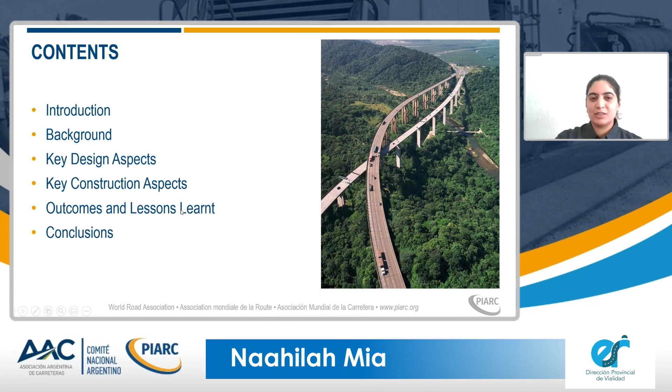Okay, perfect. All right, so the contents that I will be discussing today are the introduction, the background, key design aspects, key construction aspects, and the outcomes and lessons learned with regards to this project.

This project was located on the Camps Bay Drive, situated in Camps Bay in the west of South Africa, a major scenic route that links Cape Town and the CBD to Camps Bay and Hout Bay.

It is going to become a bus rapid transport system road, so there will be a few buses on this road. The city of Cape Town does have extensive stockpiles of reclaimed asphalt, and currently they're using this material for shoulders, which is a poor use of high quality material.

This would be the first trial where the city will be using an off-site static mobile mixing BSM foam on a road.

A background on this project: it was originally constructed in 1848 to provide access over the Kloof Nek to Camps Bay. It was then converted to a tramway from Camps Bay to Kloof Nek, known as the finest tram ride in the world.

In 1933, the tramway was ceded to the city council and converted from a tram road to a motor road called the Camps Bay Drive. When they converted it, there was no attempt to alter the old tram route by straightening the curves.

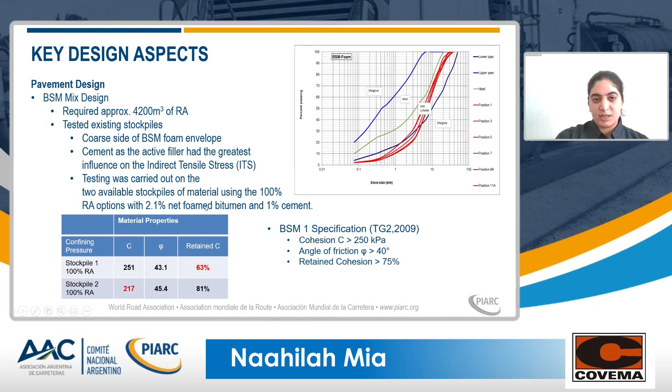So as part of the BSM design, in order to assess the impact of not meeting the specification, a sensitivity analysis was carried out on the pavement design using the deviator stress ratio (DSR), varying the stiffness, cohesion, angle of friction, and traffic loading.

For construction, we box cut the road widening by 1.4 meters, milled off the asphalt to stockpile, removed the macadam, and then paved the BSM in 200 by 100 millimeter layers. On top of that, we placed an AE2 binder asphalt layer of 50 millimeters.

The outcomes and lessons learned from this project: the BSM mix is very feel dependent, so we needed to pay close attention to the moisture content, and we needed somebody on site with experience in BSM to determine whether the moisture content was correct.

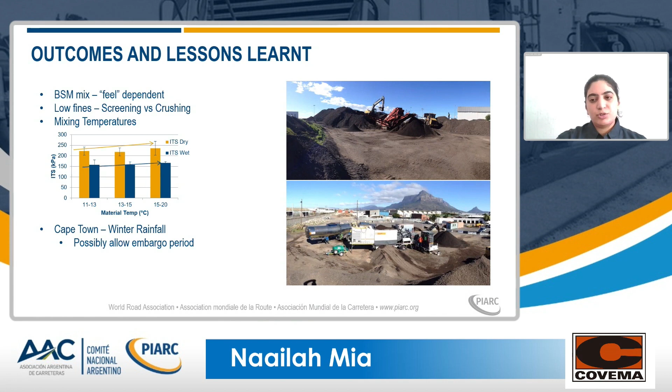After this project, we learned that maybe in Cape Town, for example, we should look at an embargo period where BSM should not be paved during certain temperatures or at certain times of the year.

In conclusion, using recycled asphalt in road construction can reduce the use of virgin aggregates, reduce emissions from transport and asphalt heating, and creates a cycle of material that can be recycled.

For volume of use, when used in asphalt surfacing or bases, you can only use approximately 20 to 40%, per South Africa's standards. But if you use it in a BSM, in your lower layers, you can get up to 90 to 100% use of recycled asphalt in roads—a more cost-effective and sustainable solution for the future in a world where we are depleting aggregate resources.

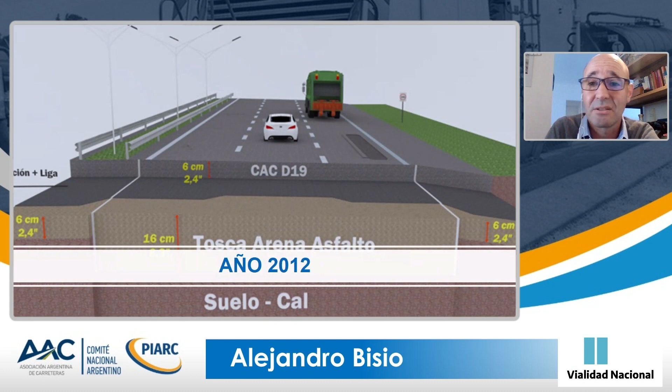The structural package of this highway was from the 80s, consisting of an asphalt layer of 6 centimeters over sand and asphalt, as you can see on the graph, and this was over lime soil.

When we started with the construction works, the structure was worn out in general, with great rutting in the slow lane and some cracking. This was the result of rigidity in the asphalt layer, and also structural insufficiency for the traffic going through this highway. So the decision was made to start rehabilitation.

The project was conducted by the University of La Plata, and given the structural status and the material status, we decided on a project for a 10-year life cycle that included the laying of 400,000 tons of asphalt mixture.

The solution for the fast lane was different from the solution for the 2 slower lanes. Let's focus on these 2 slow speed lanes, because in this structure we include the recycled material.

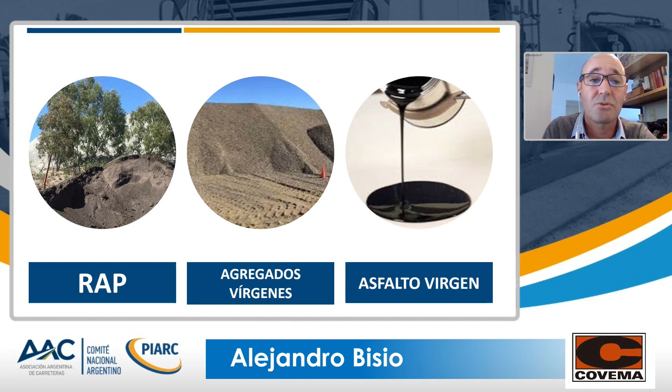If we come to the design stage, we may say that apart from the usual components of the asphalt layer, we had a new supply here, which was the RAP that came from the previous layer. At this stage, when we had to define the work formula, we decided that the performance of the asphalt mixture containing the RAP should have the same behavior and the same performance as an asphalt layer of the same nature—meaning the same granular composition and the same degree of conventional binder, but made up from virgin materials. This was the premise for the development of the work formula.

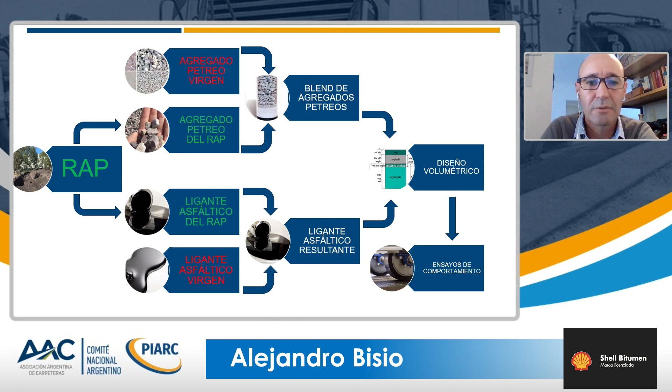Once we had the granular structure and the resulting asphalt binder, the optimal mixture of the asphalt was designed based on volumetric design. And once we got that, we started with the verification and testing stage.

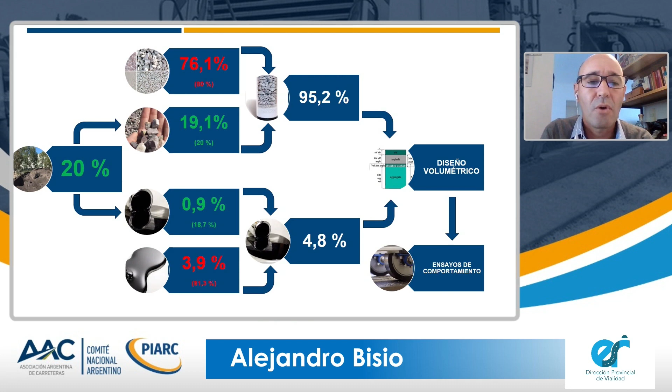Let's give some details on the design project, but this is a final result of the design process. So the recycling rate was 20%. This 20% RAP provided 19% of granular structure. 76% of the granular structure came from the virgin aggregates, 0.9% of the asphalt came from the binder contained in the RAP, and 3.9% came from the addition of virgin asphalt binder.

As to the RAP features, the mean optimal asphalt content throughout the works was approximately 4.5%, and the status of the RAP asphalt as regards its behavior had 60 degree viscosity, and the mean value, considering natural fluctuations because it's a recycled material, was 42,000 decipascal seconds.

So, for the asphalt binder, we used washing tested with methylene chloride, and the binder came from a controlled distillation through steam, and once we got the asphalt binder, we started with the rheological status test in the lab at 60 degrees.

Why viscosity should be 60 degrees? That was the reference parameter we adopted, and it's basically because in Argentina the asphalt classification is based on 60 degree viscosity. The Argentine regulation divides conventional asphalts into 5 grades, and in this case the asphalt design is the one that should be used in the asphalt mixture if the mixture should have been virgin.

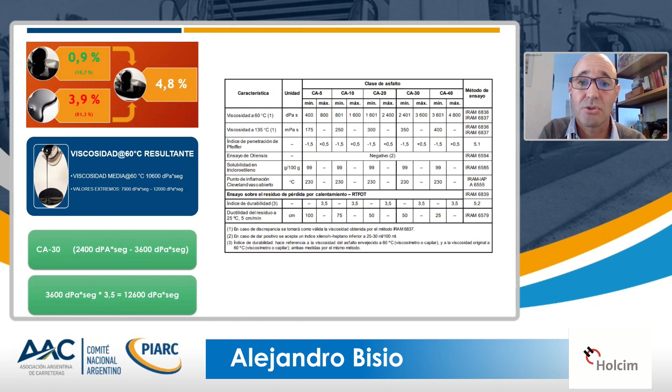Mean viscosity at 60 degrees was 10,600 decipascal seconds. In order to have this viscosity in the resulting asphalt binder, it was not necessary to use a lower grade asphalt binder. We just used CA30 as the virgin binder. In certain specific cases, in order not to exceed this limit viscosity value, we used one or two lower grade binders, maybe CA20 or CA10, but in general we used the same grade of virgin binder.

As to the granular structure, 76% of the virgin asphalt came from 2 coarse aggregates, 1 fraction of fine aggregate, and 1.2% lime because of durability issues.

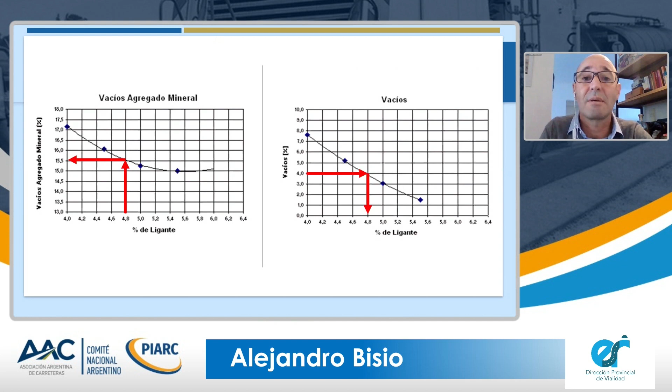Once we already had the granular structure coming from the aggregate blend and the asphalt binder, we fixed as design criterion the asphalt content with 4% voids. So then we tested this material mechanically against moisture damage and permanent deformation through the wheel tracking test.

Once we had our mixture designed, we went on to constructing the mixture. But first, we have a previous stage that is very important in order to be successful in the recycling: RAP management. RAP management is all the tasks to reduce the natural variability of the RAP because it's a recycled material.

This means that we need to divide RAP by origin or size. In this case we did not do an origin division because it all came from the same place, but only from stretches where patching was done.

What we did was division per size. We had a coarse and a fine fraction of the RAP, and also we had the possibility of having atmospheric coverage of the RAP given the weather conditions.

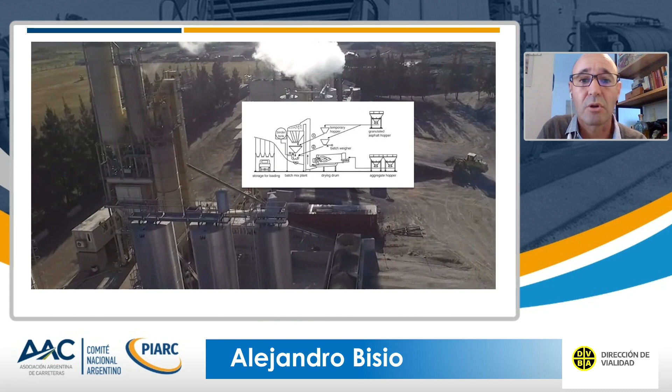So if the objective was to keep temperature constant, a difference between the two processes has to do with the temperature of virgin aggregates. In batch plants, the temperature of virgin aggregates was higher in order to compensate for that 20% RAP coming at room temperature, at ambient temperature. But we didn't find any significant difference in the rheologic properties of the components of the asphalt mixture when produced by the two different methods.

As to the compacting, this layer was laid as a subbase, 18 centimeters subbase, though this has nothing to do with recycling, but sometimes we think that this type of mixture is more complex. I can show you a photo of the works. We had the fast speed lane, and then the two slower speed lanes.

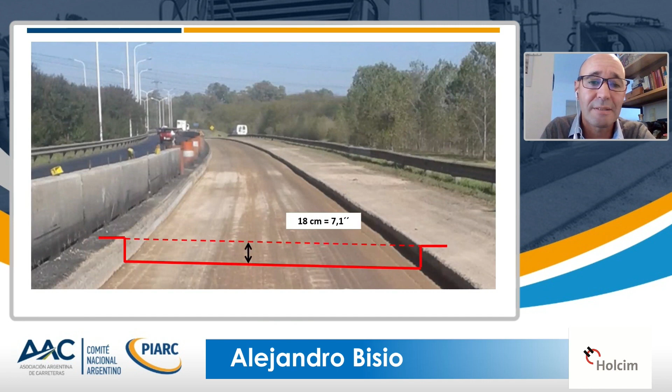Once we had the mixture, we milled the overlay, then we had an 18 centimeter trench, and the mixed asphalt layer was laid in just one single laying movement, only one operation, and those 18 centimeters were compacted with two metallic compactors, two different compactors. You can see here the photos. We had that type of box that favored all the conditions in order to achieve the compacting grade.

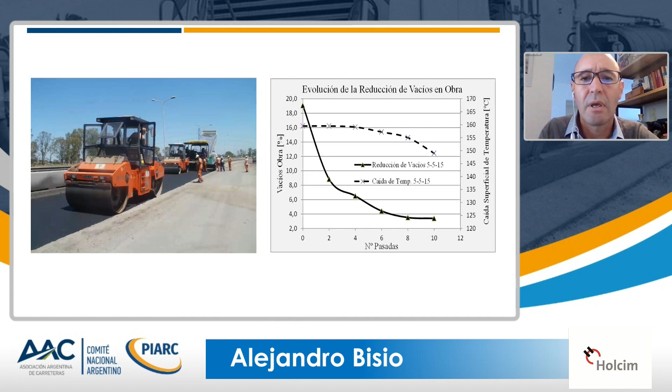In some enlargements, we laid unconfined 18 centimeters, but that was just in certain specific stretches. Then we built the cooling curves and checked them, especially for the compacting pattern design, in order to fix this compacting process, and this formula was used during the whole job. You can see a photo of the 18 centimeter samples.

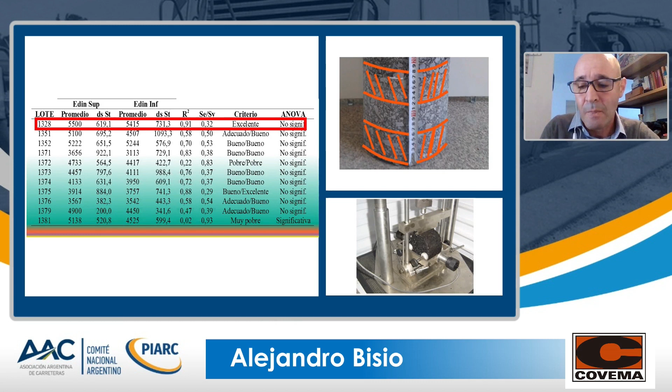Cores were used to evaluate the homogeneity of these cores, and this was successfully verified, with no differences as to the void content between the different cores. In the upper part, there are better compacting percentages than in the lower layer, but this is something to be expected. Here we can see certain mechanical results.

If we did the stiffness test, we found that there were no significant differences in the stiffness value between the upper and lower part of these 18 centimeters, having mean stiffness values of 4,500 to 5,000 megapascals. This is the look and feel of the job at the end of construction.

Now it has been going for 9 years, and these are photos of the current status at September 2021, where after 9 years of service there are maximum levels of 3 millimeters rutting.

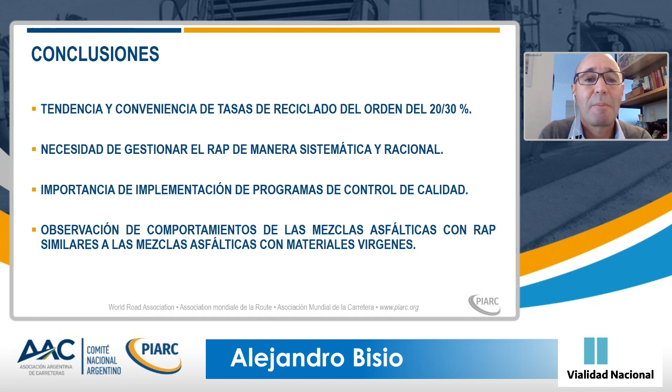As a conclusion, I would like to thank you for listening to my presentation, and we can say that for these recycling rates, while originally the trend was to use 50% or more recycling rates, in this case the trend was to use a less ambitious recycling rate, 20 or 30%, but they are nonetheless important from the environmental and economic points of view. By working with these recycling rates, the job can be easily done with the resources available.

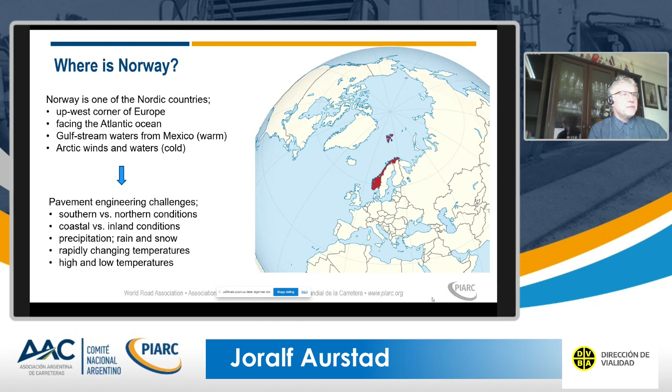As everywhere else, road users expect optimal driving conditions at all times. One special challenge in Scandinavia is our use of studded tires to better ensure traffic flow and safe driving conditions during the winter season.

Where we have safety in the winter, we can have problems in the summer. During or after rainfalls, when these ruts fill with water, they may cause risk of aquaplaning and problems with splash and spray. We also see an increased problem in cities due to fine dust particles coming from this severe asphalt wear.

And this has actually become a serious health issue in my country. We are constantly working on reducing studded tire wear through optimal mix design and use of high-quality aggregates. In some areas, this is now also combined with studded tire limitations.

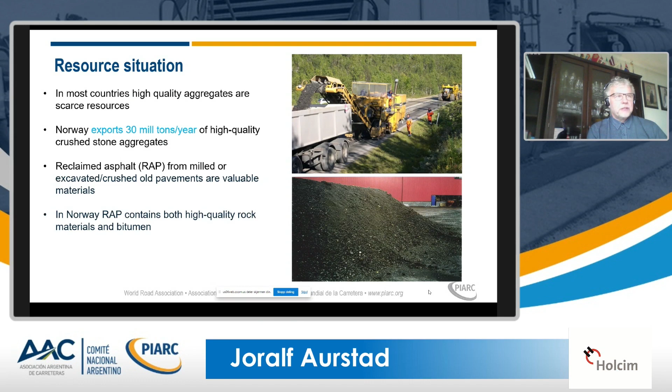Every year, more than 1 million tons of reclaimed asphalt materials are generated from milling and excavating operations on Norwegian roads and streets. It has been a challenge to utilize these materials properly in our long and narrow country, cleaved by fjords and mountains.

The road construction industry can be a rather conservative business in our country, because they are so used to high-quality, new, virgin materials. And as road owners, we must also admit that our road construction manuals and specifications have also been based on traditional experience. Here, we all really need to change the way of thinking.

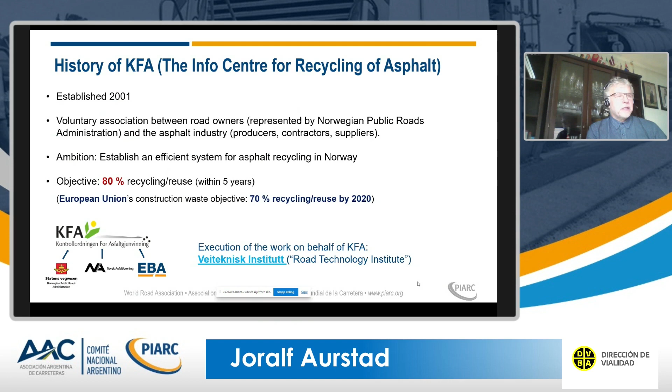The InfoCenter is financed by collecting an earmarked green fee on bitumen sold to be used in the road sector in Norway. The green fee is currently 7 Norwegian krones, about $0.8 per ton bitumen. It can be mentioned that the total bitumen volume in our country for asphalt pavements is quite constant, about 350,000 tons per year.

And wherever a construction, milling, or excavation job takes place in Norway, the contractor is obliged to bring the reclaimed asphalt materials to one of these sites. The sites all report to the InfoCenter on the material streams going in and out their gate, what is received versus what is used or exported.

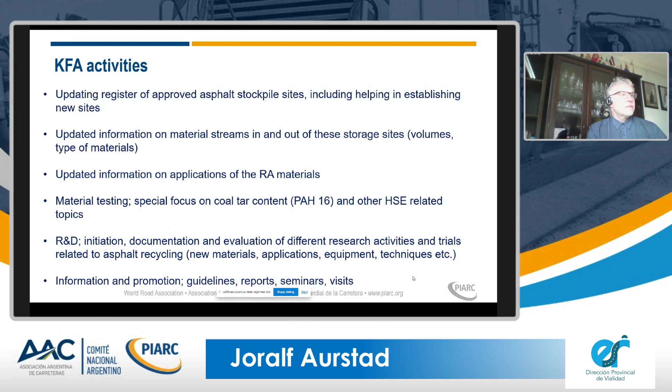We can see that we are far above the targeted 80% that we set 20 years ago. Actually, we are above 100%, showing that we are now also eating from old stockpiles from before the InfoCenter was established.

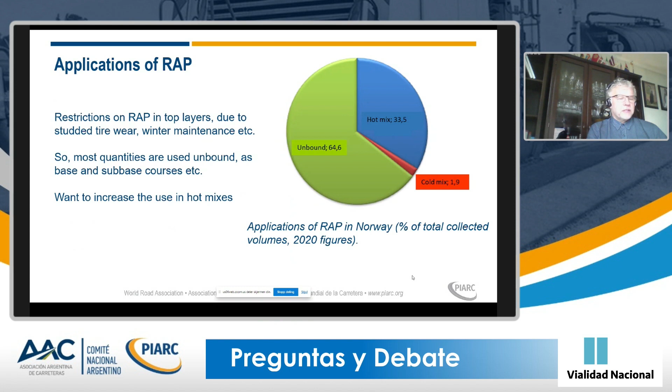One reason is that we have very high quality demands on asphalt pavement aggregates, due to our winter conditions and our use of studded tires, as I showed in the introduction. But we have higher ambitions on this, and we are sure that we also will be able to increase substantially the amounts going into hot mix applications.

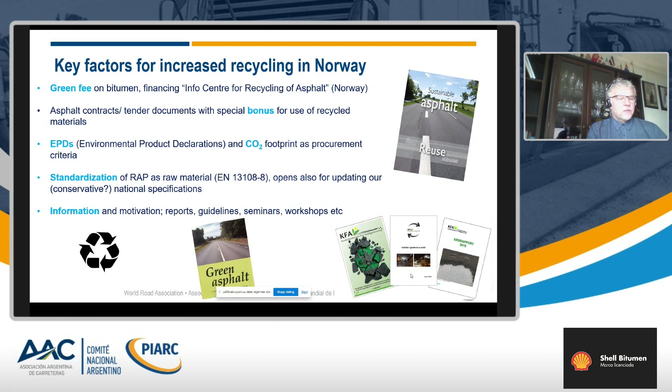Just to sum up, establishing the Info Center for Recycling has been crucial for putting asphalt recycling into system in Norway. We are also constantly looking for improving our contracts, again, together with the industry. For instance, by trying out different bonus systems.

And we have now also taken environment and carbon footprint in as a procurement criteria, together with costs. And here, as you know, use of recycled asphalt immediately gives a substantial effect. The fact that we also have a common European standard for recycled aggregates is also an important incentive.

But again, both industry and customers in Norway are used to cheap and abundant high-quality virgin materials. Therefore, for promoting recycled materials, information and more information again is very important. This is an ongoing process. The recycling wheel does not spin by itself. And here, the Info Center plays a leading role.

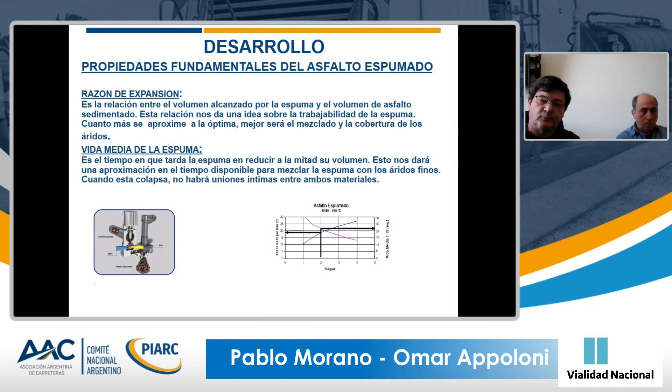So 100% of RAP was corrected with stone fines, commercial lime, and soil from the base.

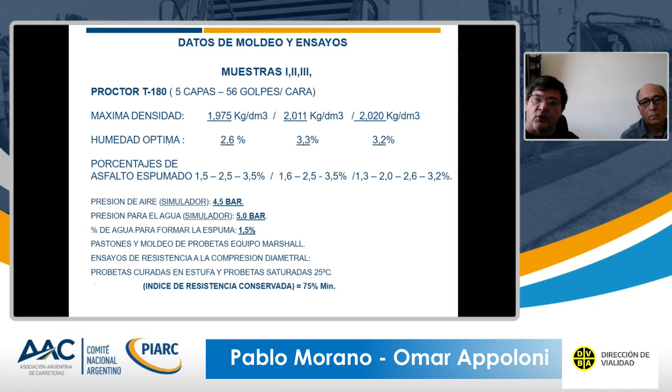Then the molding of the cores was done using a Marshall equipment, and we did resistance testing and diameter compression with cured cores using a resilience index that was at least 75%.

Of the 3 samples or cores that we used for the tests, the one that gave the best results was core number 3. And here, based on the foam percentage in the asphalt, we started checking the remnant stability.

to get the percentage of asphalt that we were going to use for remnant stability. And the other process we needed to do to know how much asphalt we needed in our mix was injection time, to know how many grams of asphalt we were going to incorporate into the mix.

In the first stage, the lab stage, we can get to the following conclusions. We incorporated more asphalt from 1.3 to 3.2 in sample number 3, and we molded cores with each percentage of asphalt to do all the tests we wanted to conduct in the lab.

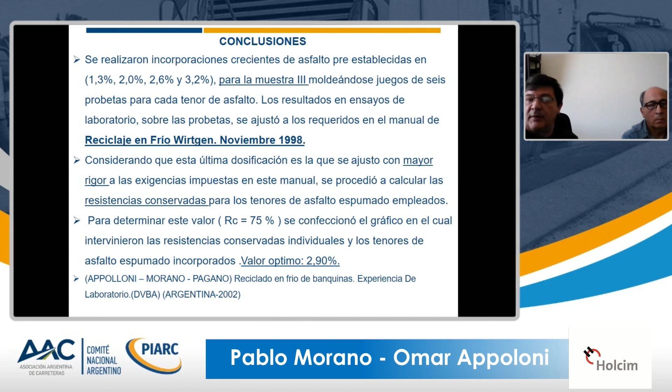We also took into account the maintained resilience to know what type of asphalt we needed to use. So in this case, the optimum percentage of asphalt to use was 2.9%. That was our conclusion, and that was the first stage, the lab stage.

Based on that, after a few years, we tried to do a test run on a road where there were works. We got to a stretch that we could use as experimental with 3 characteristics: one was the original design of the road, and the second one with granular stabilization and foamed asphalt.

with a base that was covered with 2 layers of asphalt mix. One was 5 centimeters and the second one was 10 centimeters in thickness. What was used in this case was 73% of RAP.

We added 10%, the soil that was 10% of fines. Soil was 15% and commercial lime was 2%, and the curve was within the limits of the manual. Here we can see the curve, at the bottom, with a contribution of more fines added and then more cores added.

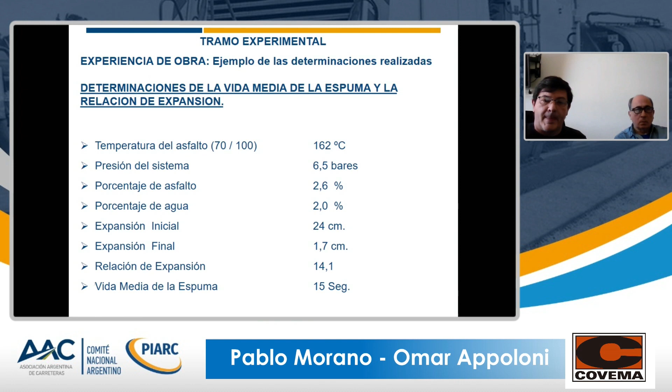Temperature was 162 degrees, 6.5 bars, 2% of water, 2.6% of asphalt, and the initial expansion was 24 centimeters, and final expansion was 1.7 centimeters. So expansion ratio was 14.1, and half-life of the foam was 15 seconds.

We prepared Marshall cores with 75 impacts per side, and the density was between 1.99 and 2.03, and indirect traction was RTI of 6.0 kilograms per square centimeter.

In the Marshall tests, we got stability that was 700 kilos. Remnant stability was 90%, which is above the 75% marked in the standard. Marshall fluency was 2.7.

To those probes we conducted all of the tests with a dynamic module with 2 different frequencies, 2 and 5 hertz, with a load of 100 kilograms, and the modulus we obtained were 4600 and 4700 MPa. That is for the Marshall probes taken to the lab.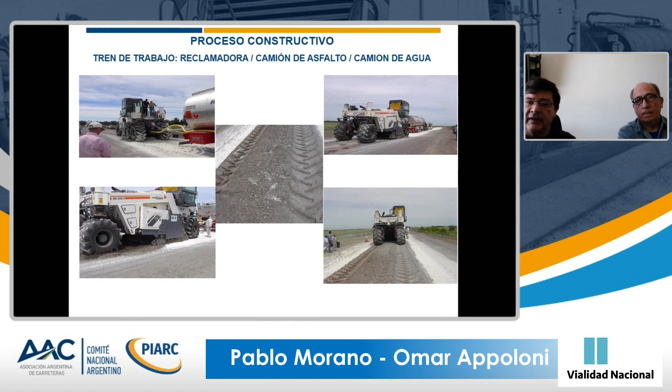Here we can see the construction process that was used: first lime, then the correction material, and then it was reclaimed. Then the asphalt truck incorporated water and virgin materials.

Here we can see the on-site measurements of half-life of the foam and the expansion ratio, and the depth of the reclaimed material, to take the samples that were taken to the lab and do all the tests we mentioned before.

Once this was executed and once some time elapsed, around 6 months, we extracted cores in order to analyze the behavior of the base through the lab tests.

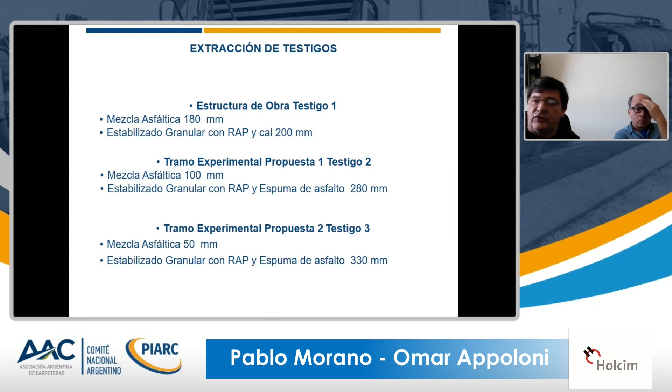The original work consisted of granular stabilization plus 180 millimeters of asphalt mix. In the experimental stretch, which was 100 meters, we had granular stabilization with RAP and foamed asphalt at 280 millimeters and an asphalt mix of 100 millimeters. In the second stretch, manuals always indicated that with granular stabilization using asphalt foam, you could have 50 millimeters of asphalt mix, which is what we did, but the granular stabilization was 330 millimeters to match the geometry without altering the bid specifications.

Here are the details of what I just explained. We had cores 1, 2, and 3, and the total thickness was comparable, but since the original granular stabilization was done with lime, it couldn't be extracted completely for test 1. In the other two, with the foam, we were able to extract the total thickness and have complete cores.

We cut these cores into 3 sections, and compacting was checked at each stage of the total thickness to verify good compaction and behavior throughout. As I said, we studied the top, medium, and bottom sections.

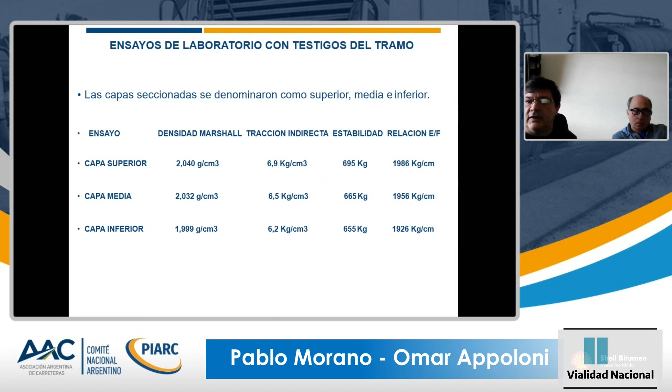Indirect traction, one of the parameters we evaluate through these indirect measurements, behaved very well. It was above 6, going from 6.2 in the bottom sample to 6.9 in the top sample. Stability was from 650 to 690, and the fluency was around 1900.

The dynamic moduli from the cores extracted at 2 and 5 hertz in the middle and top layers were similar to what we obtained in the lab tests under lab conditions, and in the bottom layer it was reduced because there's a decrease in compaction. But the important thing is that in the top and medium layers, this reduction would not apply.

Another important thing is that at that point we did not have a deflectometer, so we used a Benkelman beam for deflections in the two areas with different thickness, and in another area outside the test zone.

What we could see here is that both when we used lime granular stabilization with 18 centimeters of asphalt layer, the surface measurements matched what happened with 5 centimeters of asphalt layer, and it was a little better. When we had 5 more centimeters in the asphalt layer, deflections dropped, but the curve radius increased.

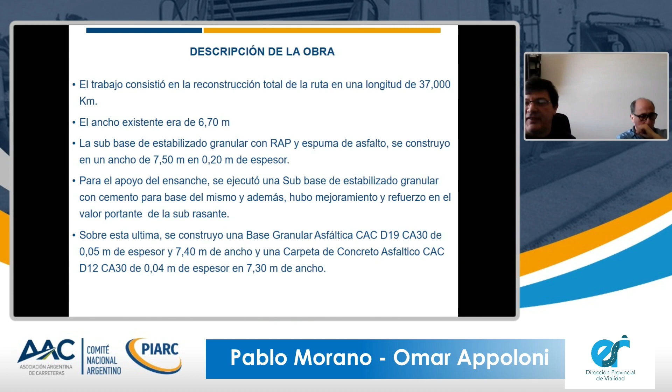Now we are doing asphalt mix in one stretch, and the other was the granular asphalt subbase, and this has been in use for a year. That is optimum. Unfortunately, because of the pandemic, we were not able to go on site and check the structural status of that base nowadays.

This was the status when we found it. This was the condition - it was a problem of the top layer. On the sides, in order to be able to use the foam, we used cement granular stabilization to do continuous foaming in the 7 meters.

Here you have the process when we did foamed asphalt, and at the bottom you can see the surface of the foamed asphalt, and on top of that we built the other 2 layers.

The conclusions: what's important is that thanks to the experimental and lab stages, we were able to apply this to actual works on roads in the province of Buenos Aires, and we are planning 2 more. Really, the important thing here is to notice the good behavior of this type of base and the reduction of asphalt thickness.

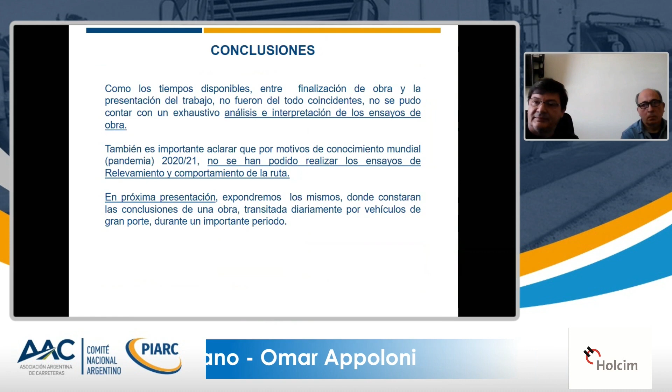The next presentation is about the Uruguayan experience in the rehabilitation of flexible pavements with foam asphalt.

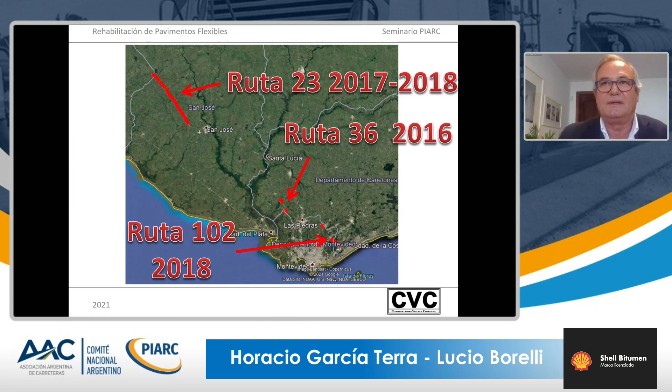Then in 2018, we also rehabilitated Road 102, a road our company had already constructed 10 years earlier, which had reached the end of its life cycle. So we rehabilitated 2 roadways.

Afterwards, we did a small rehabilitation stretch of 2.5 kilometers on Road 33 in 2019. Today we are focused on the Road 102 stretch from 2018, with an AADT of 22,100 vehicles, of which 3,300 are trucks.

So now I will give the floor to our resident engineer, so he can give us details about the implementation of this technique on this job. Good morning everybody, and good afternoon to other regions.

As Horacio already said, this road had been constructed 10 years ago and had 16 centimeters of mixture and 45 centimeters of granular material. When we had to do the recycling with foam asphalt, there was already crocodile skin cracking, and we realized that during recycling some blocks could come off.

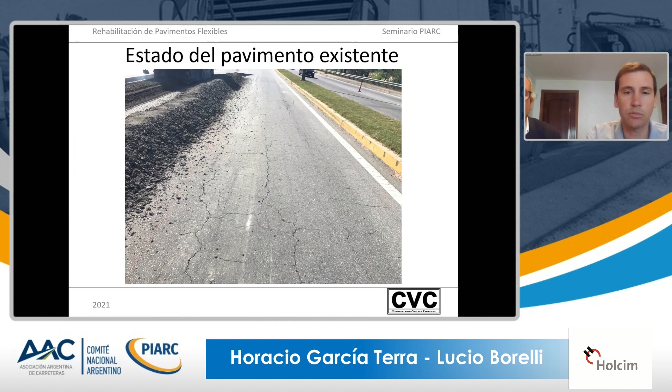This implied extra cost for the road administration. We were asked to first do a test of recycling with no milling, and we found there were already blocks forming, which is not desirable in this layer. So we were forced to do pre-milling, pre-profiling, and pre-compacting.

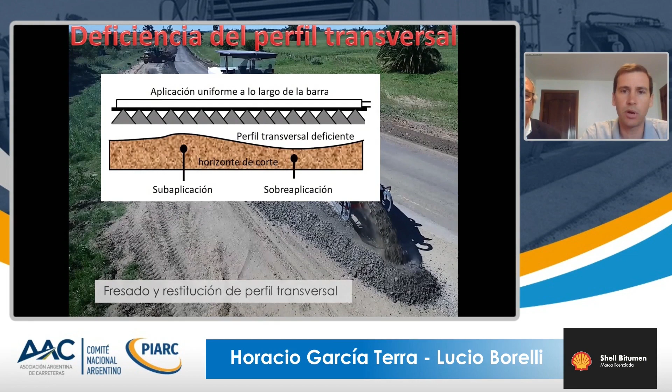Pre-profiling is very important, because if there's a deficiency when you apply the foam asphalt together with the Portland cement, you may get under or over application of these materials. Cut planning is one of the most important tasks when you recycle a road.

You need to take into account the asymmetry of the recycling machine, because the right side recycles next to the road edge and on the other side there's a half meter mismatch. I don't want to go into too many details about planning the cross-sectional cuts, but it depends on many factors.

In the case of Road 102, on the first day we did the slow-speed lane, laying the Portland cement without lapping, which is very important because it helps distribute the foam. But we need at least a 15 centimeter lap between cuts, not lapping the Portland cement, but doing a lap in the foam asphalt.

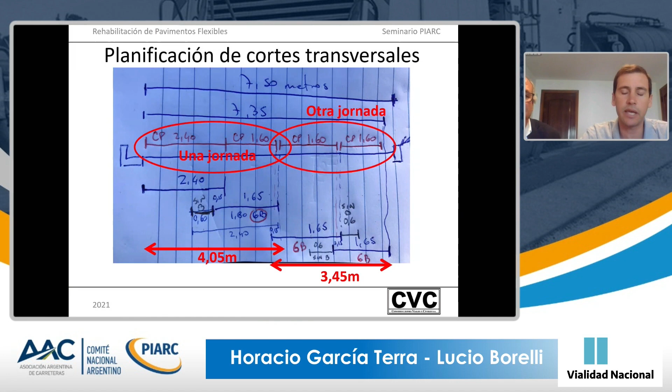As for longitudinal cuts, it's important to point out that we need to take into account the asphalt cement, and we cannot use up to the last drop of asphalt cement.

We loaded an asphalt machine with 20 or 30 tons, but only used 27 tons of the asphalt, and those 27 tons resulted in 375 meter stretches that could be used during the morning.

It's important to try to avoid joints, because transverse joints mean you need to lift the machine and reconnect the asphalt mixer. So South African engineers taught us a good trick: you do the first cut, and within those first 375 meters, you disconnect the water system, go back, reconnect everything, and start the second cut.

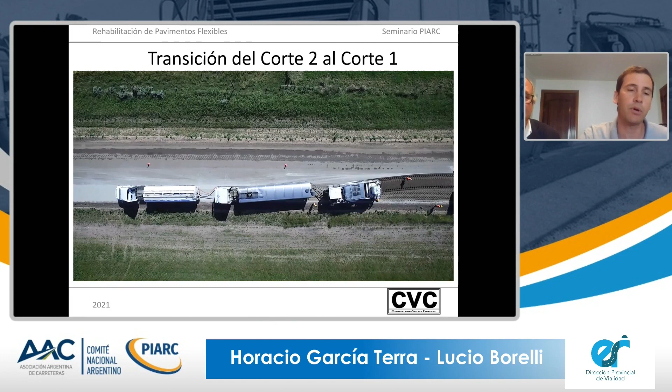30 meters before reaching the first end, you close the foam nozzle, and make the transition from one cut to the other. One meter before repositioning the machine, you turn the foam nozzle back on with the mixture already prepared, avoiding time wasting.

It's important to pay attention to the checklist at the beginning of the day. You need to follow the checklist because this avoids issues and problems. We need to check that water is coming out from the foam nozzle, and check how the water and foam are coming out of the nozzles.

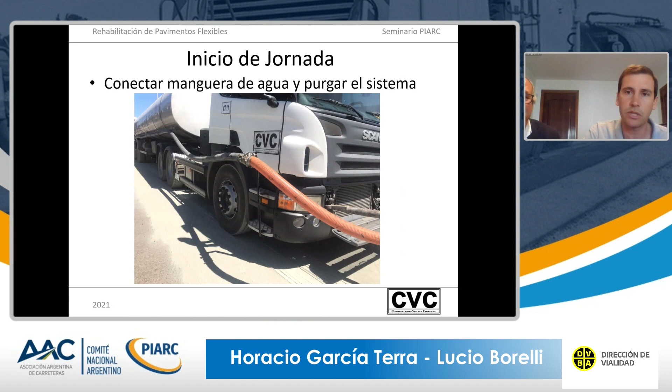At the beginning of the day, we connect the water hose that goes through the whole truck. We have 25 meters of water hose, and when connecting the hose to the recycling machine, we have to check all the elements. Then we add the Portland cement to the already marked road.

We mark all the stretches, and this is very important to avoid lapping of the Portland cement, with a 15 centimeter lap among cuts. 15 centimeters may seem a lot, but when you use it on a road, it's good, and you need to have a good guide wire system.

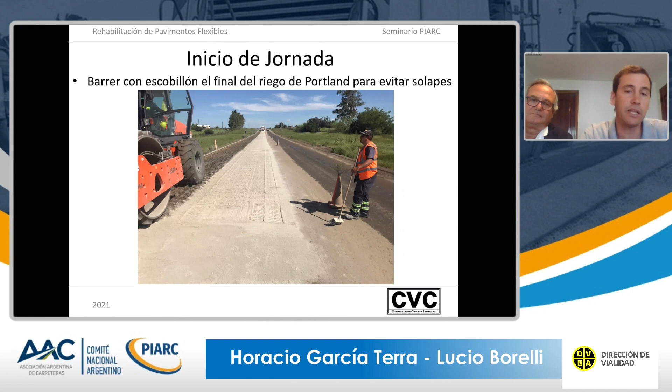Once we laid the Portland cement and swept it, if you are doing a lap, you are including 2%, and you may find in time a transverse cracking. That's why you need to sweep.

Then we heat the outlet of the asphalt truck hose, and we need to make sure we take out the stopper, the plug that is there. Once we remove the asphalt plug, we connect the asphalt hose to the recycler, and we do an air purge until we have a constant flow of foam through the central nozzle. That's when we can start recycling.

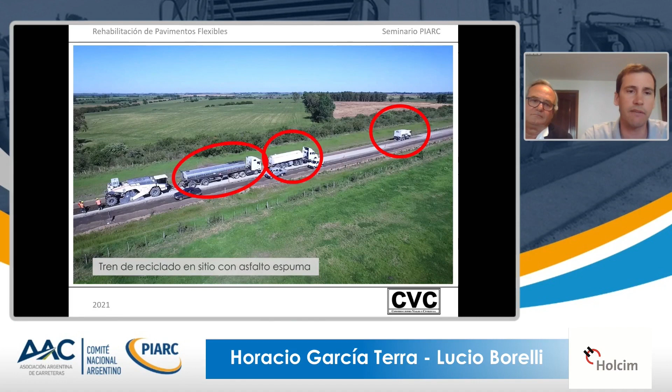We can see a photo here of the recycling train with all the different machines. As I was saying before, Road 102 had 22,000 vehicles a day with a median and many vehicles, and we have to deviate all the traffic in order to work.

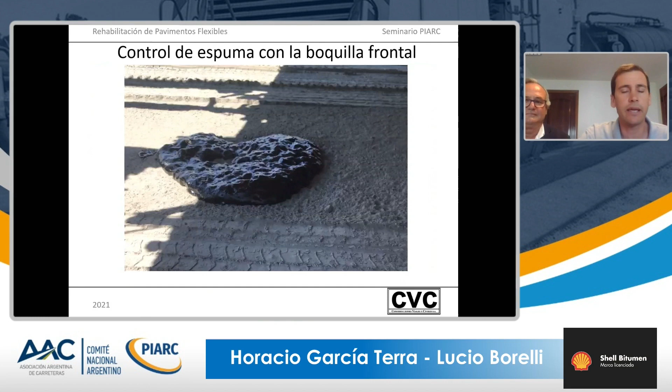When we start the day, we need to check with the infrared camera to detect any obstructed nozzle, and we also need to monitor that the foam is okay in the front nozzle.

There's a person always helping the machine driver, especially in the curves, to help guide the truck driver for the lapping. We need to make sure that...

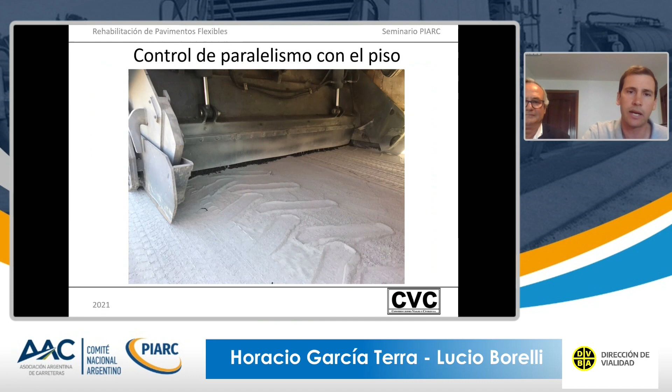We go on the right lane, and we have an iron rod to check that we are getting to the recycling thickness. On the left side, what we need to monitor is that the machine is parallel to the road.

The control of the foam nozzle, the foam pump, should be over 3 bars to ensure good quality foam. If you suspect that a nozzle is not working properly, the machine has the order of feeding 2% asphalt.

This is 232 per minute. If you close one nozzle, the asphalt pressure should increase, because 232 kilos is what you need. This makes sure that the nozzle is working properly.

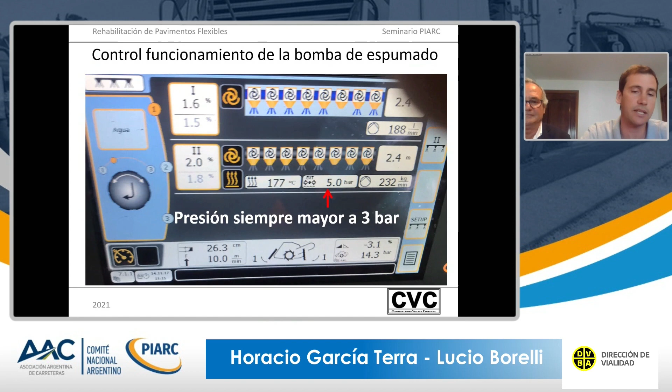We know that it has to be 232, and it's very important that the pressure is over 3 bars all the time. This should be considered all the time.

I'm not going to go into lab details, but the sample taken should include the whole recycling thickness. This is very important. As for compacting, the truck driver should choose the stretches for passing the compacting machine, maybe.

7, 9, 8 passes. But in this case, the driver must choose up to what extent, or what is the stretch to do the passes, and then go back.

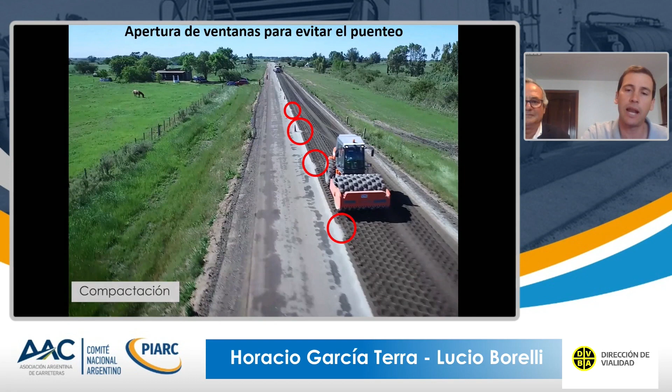The driver needs to have a guide in order to be able to compact the whole thickness of the recycling stretch, and this is very important.

We need to clean the roll of the truck, because if not, it loses its property. Once this machine finished...

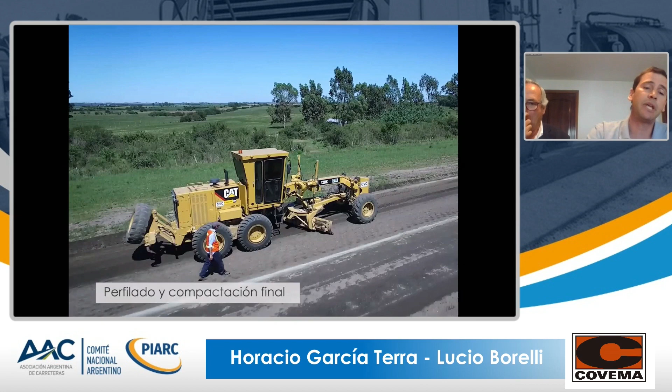Then we have profiling and final compacting. You can see there the pictures during the whole recycling process and the different compacting stages.

We need to take into account all the steps to follow. The important thing is not to lose moisture and wetness. As a conclusion, then we have the slushing. The slushing is a saturation of the surface and high-speed tire passing to seal the stretch.

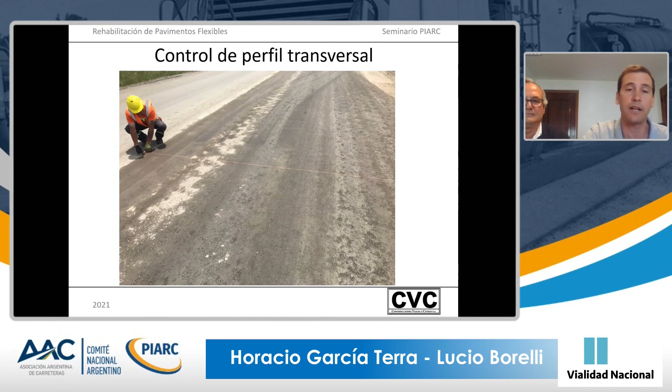We need to have a cross-sectional profile control because these prohibit over 5 centimeters overlaid. So we are going to place 4 or 5 centimeters of layers, and there are no deficiencies allowed here.

We are talking about highly abrasive materials, and we need to change the blades daily. We need to change blades every day, or change them every 2 days.

When you finish one stretch, you need to disconnect the asphalt tank, and with this valve you close this, and the recycling goes backwards. You can see here the recycling machine going in the reverse direction.

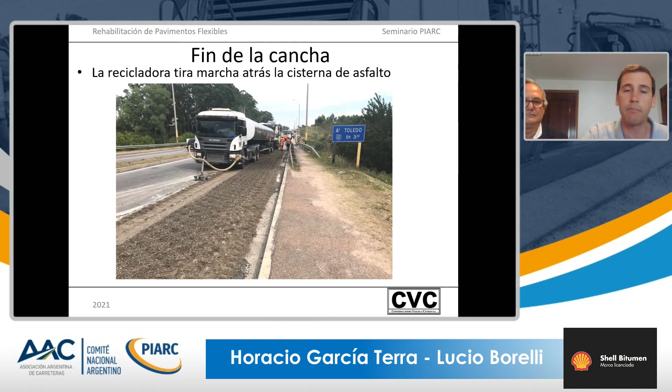Five days later we realized that there were some issues and some things that were missing, and we had to do some things to solve this issue.

First of all, we need to close the water tank valve and the asphalt tank valve, close the recycling valve, and purge the pipeline. Those 25-30 liters will be dumped into a 200-liter drum.

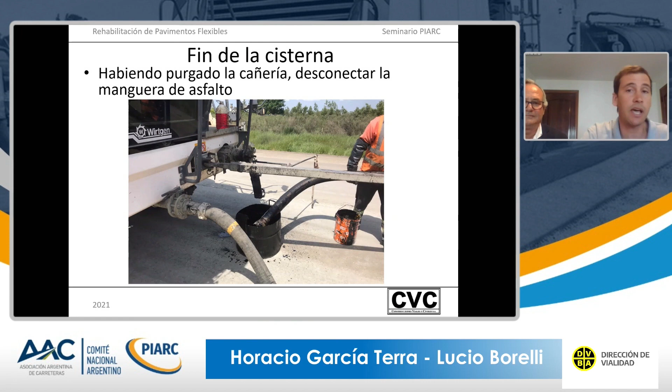Then, when we end the day, it's important to clean all the nozzles in the recycling machine, and this has to be done outside the recycling stretch, because otherwise we will be creating issues in the recycling stretch.

In the case of Road 102, we need to remove the excess material, and this excess material was removed from the place, along with the remaining material that was on the curb.

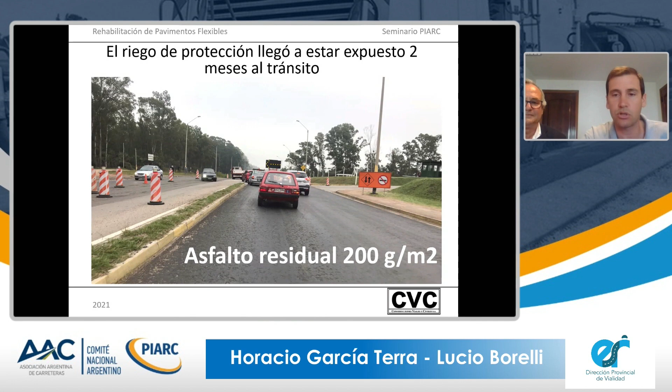Then we need to do protection irrigation, and in the case of Road 102, it was exposed for 2 months to traffic with 22,000 vehicles a day. This irrigation of 200 grams per square meter should be done twice, irrigating 1 liter of diluted solution.

Then we also did 4 centimeters of traditional asphalt mixture, taking all the precautions required with this thickness.

A very important logistic problem that is not taken into account many times is the consumption of water. A lot of water is consumed in compacting and in keeping the stretch wet, and it's really an issue in many regions or places to get that amount of water.

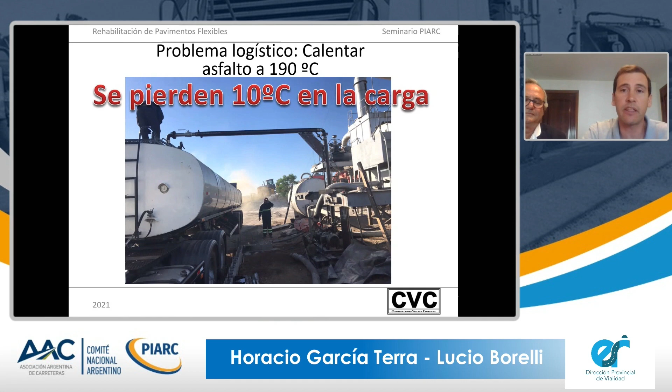Also, the warming of the asphalt at 190 degrees centigrade when we have it at 150 degrees. So in order to have the tank or mixer working at 180 degrees, we lose 10 degrees centigrade.

Road 102 had a traffic counter that classified the axles, so we could calculate the equivalent axle number. There were 1.6 million axles that went through this road, and there's no rerouting, though there are 5 traffic lights.

You can see the current state of the pavement, and the only issue I found is this cracking here, which just requires sealing.

The IRI after 3 years is 1.5 meters per kilometer, though it's a very urban stretch with a lot of traffic. So thank you very much.

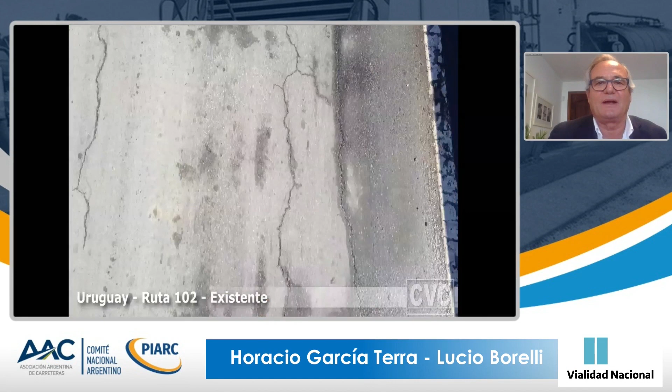Here we can see a graphical presentation of what Lucio has described so far. These are images from Road 102.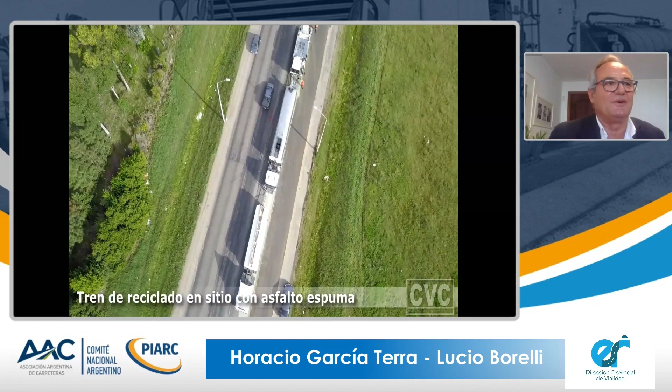I would like to thank the Loudon International, the South African colleagues who helped us apply this technique, a technique they have been researching and working on for over 20 years. They have been doing research on stabilized asphalt mixtures and foam mixture asphalt, and I would like to mention them because we are already friends after working together for so many years.

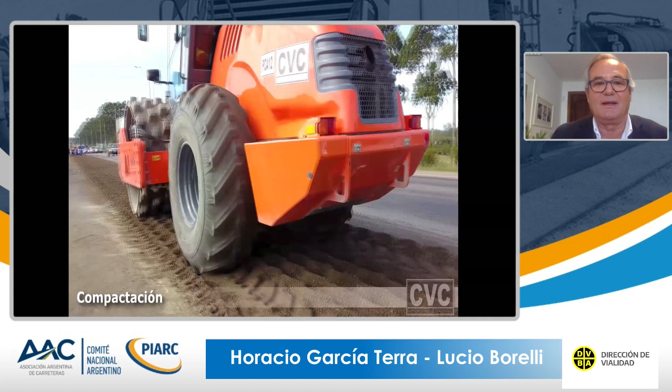Here we have the profiling and final compacting, and I would like to thank PIARC for the invitation to share our experience with the world.

I would also like to tell you that we have a project for next year. Route number 6 is a PPP project for the rehabilitation of 74 kilometers of road, and the whole project has been designed by ourselves using foam asphalt stabilized techniques. Thank you very much.

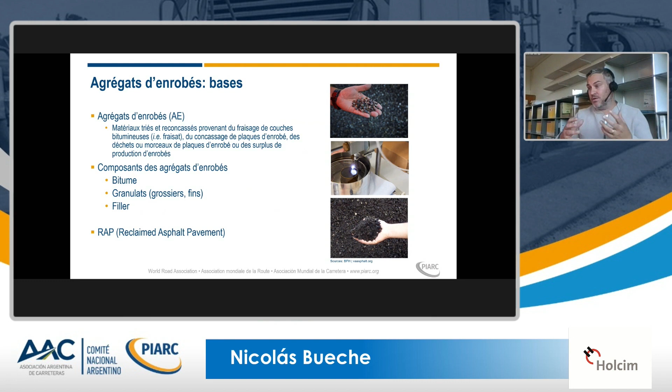We also call it the same as you - reclaimed asphalt pavement. This is a table you can find in our Swiss standards. Basically, we have two ways of including RAP: cold mix, so cold addition, or hot addition. Usually we do only hot addition of RAP, meaning approximately 120 degrees in the plant.

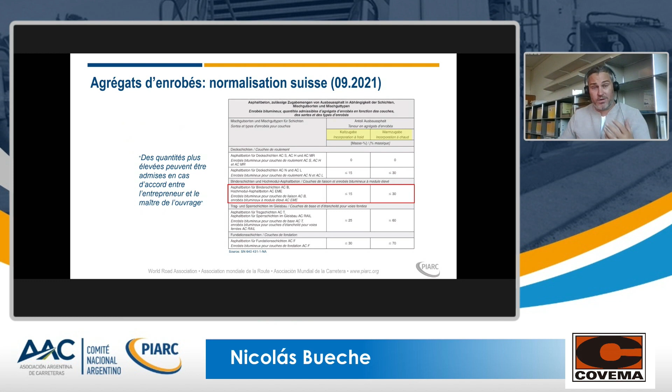Speaking about high modulus asphalt, according to current standards, it's up to 30% RAP in high modulus asphalt. For top layers with very high solicitation, we won't have that much RAP, but for lower layers we can go up to 60 or 70% RAP in asphalt mixture. But for today's topic, high modulus asphalt EME, according to the standard we can go up to 30% reclaimed asphalt.

Now let me explain briefly what we call EME, high modulus asphalt, enrobé à module élevé. As everybody knows, Switzerland is a small country, so our strategy is quite simple: we try to look at what the French are doing, what the Germans are doing, and then we just pick what is interesting for us. That's what we did basically with the EME, the high modulus asphalt.

It was initially developed in France in the 80s, if I'm correct. There are two types: Type C1, which has high rutting resistance, and Type C2, which has high fatigue resistance. We had a research project in our country where we defined a bearing capacity coefficient for high modulus asphalt. Basically, high modulus asphalt is the product which has high stiffness, high rutting resistance, and high fatigue resistance. It's a top product that we use mainly on highways.

Going back a bit to the standard, as I told you we have two types, C1 and C2. Basically, high modulus asphalt needs a very low penetration binder, 10/20 or 15/25. What's interesting is this water sensitivity aspect, the ITSR ratio, which to my perspective is a bit of a joke because we have a limit value of 70%, which we can reach quite easily.

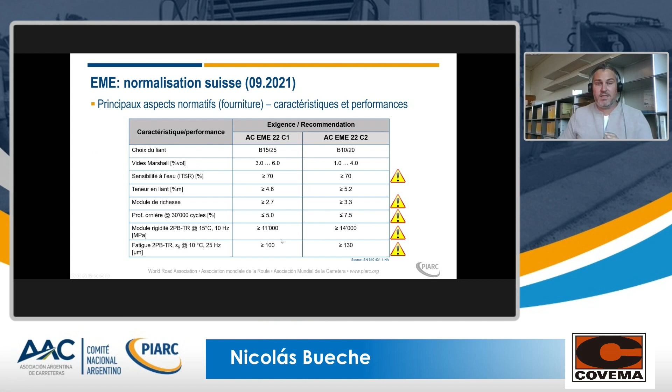But what is interesting is rutting resistance - French rutting tester, maximum 5 or 7.5%. We need high stiffness, 11,000 or 14,000 megapascal, and very high fatigue properties, which is a bit of a tricky point. Working with high modulus asphalt, you have to on one hand get high stiffness, but on the other hand have good fatigue properties and performance. What you find in this table is basically a summary of what we have in our national standards.

Now we spoke about RAP, we spoke about high modulus asphalt. What we mean by warm mix asphalt, I think it's worthwhile to briefly define it, because I have seen in some countries warm mix asphalt which were, to my perspective, quite hot. So what we call warm mix asphalt in Switzerland will be an asphalt mixture produced and laid at approximately 120 to 130 degrees maximum. Normal mixture is produced at 160 degrees. Here we want to produce and lay the asphalt at 120 degrees.

We have different products, different ways to do it, but most of the plants in Switzerland work with the foaming technology. As some of you know, Switzerland is an Ammann country - Ammann is a very important plant producer, and most of our plants work with the Ammann foaming system, which uses one bitumen plus bitumen foaming. So the technology applied in our projects is really foaming technology for warm mix, produced at 120 to 125 degrees.

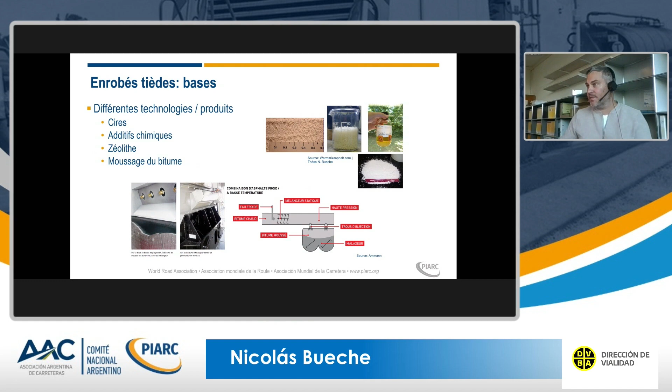Now I come to our project. To make things clear, it's not my project - it's a project initiated by our National Road Administration, where there were a lot of actors: private labs, consultants, etc. I was lucky enough to be part of the project to make the summarizing report and some coordination, but you have to see this as group work, not my own.

I will explain briefly the motivation and some results we got. The motivation is quite easy. For the National Road Administration, we use high modulus asphalt - so you have a top layer, then 2 layers of high modulus asphalt, which at the national level we use quite a lot. And now, as everybody, we have this sustainability issue, and we believe we have to bring a substantial contribution to the energy and environmental aspects. That's why the National Road Administration said, okay, we want to produce this high modulus asphalt in a warm mix perspective, but adding a high percentage of reclaimed asphalt, which is a bit tricky.

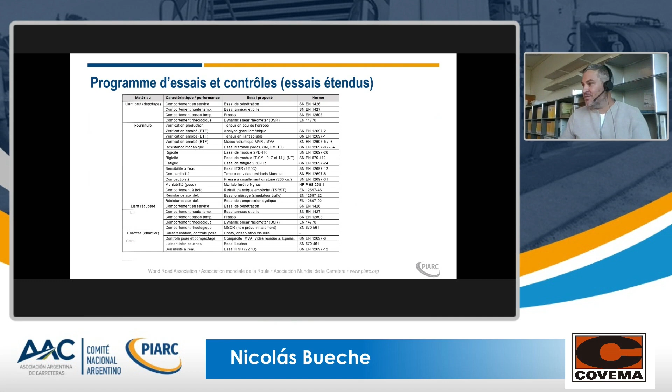This is just a general table showing that we made quite an extensive laboratory testing phase. We analyzed bitumen, bitumen delivery, recovered bitumen, binder analysis, asphalt analysis, low temperature and high temperature behavior, stiffness, rutting, etc. I won't go through every test result, otherwise you'll be late for lunch. We just picked some specific topics - let's explain what we got for stiffness value, fatigue properties, rutting resistance, water sensitivity. Just a short summary - if you need more information, please ask. I will briefly explain some results on the asphalt mixture scale and also on the binder scale.

What is interesting for us, because I think most of the countries are also pen ring and ball oriented, and we believe in Switzerland or many other countries, going with higher RAP content, going with warm mix, with more complicated asphalt mixture, pen and ring and ball is not sufficient anymore. We need to go on with other tests, with more specialized tests. Based only on this test, we cannot make that much difference.

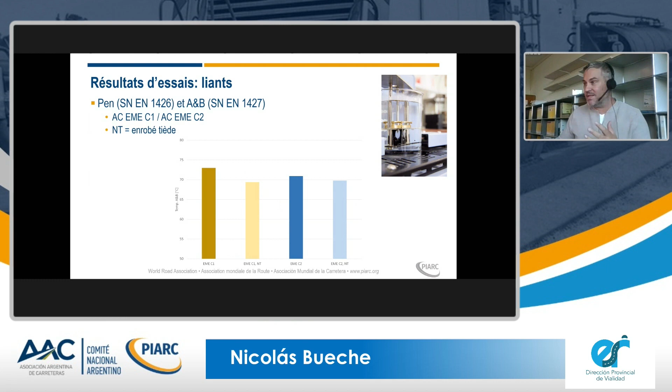That's why in the second phase we went on with some DSR, some dynamic shear rheometer testing. A very short summary: using the DSR, we analyze the rheological behavior of asphalt. You pour a very small quantity of asphalt, and you have a shear loading with a given frequency, sinusoidal loading, and then we can see the behavior of the binder in that case.

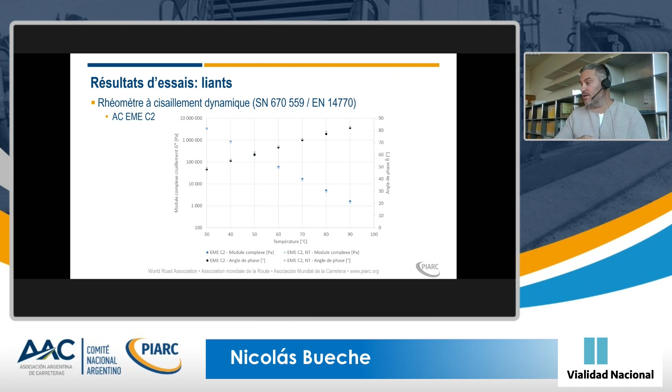If we do the same for the C2, this is the other high modulus asphalt, we can see similar trends, meaning that the hot mix has a bit higher stiffness than the warm mix, and the warm mix has a bit higher phase angle than the hot mix, which is quite logical, once again, if we consider this aging issue of the binder.

We also made some other tests. We made some multiple stress creep recovery tests. That's basically a way to assess the rutting susceptibility of the binder. We do it still using a DSR method, and the principle is quite easy. We have some loading and unloading phases, and we measure the recovered deformation and the remaining deformation of the binder.

By using this, we could see some difference between the hot mix, which are the dark bars, the hot mix and the warm mix, and which was for us quite surprising, that we have a better behavior for the hot mix than for the warm mix, and it was quite interesting to see this, which is to be related to the fact if we consider the EME, the high modulus asphalt mixture.

Usually we always say when I add RAP it's a hard binder. In the case of high modulus asphalt, we have to keep in mind we work with very hard binder, it's a 10/20 or 15/25. This means the binder coming from the RAP is a high penetration binder, so a softer binder. So the binder from the RAP is a softer binder in the case of high modulus asphalt, while usually we always say the binder coming from the RAP is a hard binder.

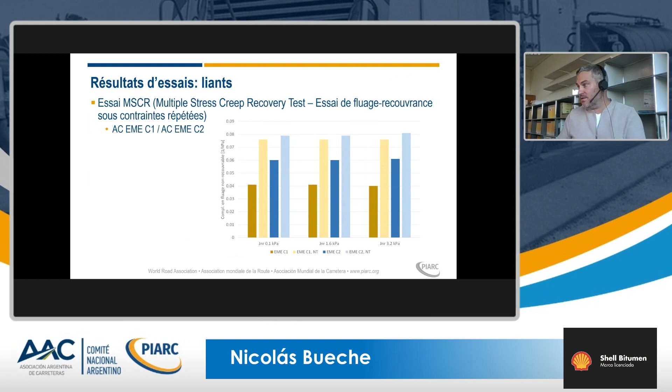This is the rest of the test for the multiple stress creep recovery tests, where we could really see some difference between warm and hot mix asphalt.

And then we made some more classical tests as well. There is no, let's say, Marshall limit value for high modulus asphalt. This is because usually we do rutting, stiffness, etc. But anyway, we did the test because it's a test where we can have some experience value, we can make some comparison.

And here you could see, for instance, the Marshall stability was higher with the hot mix asphalt than for the warm mix, and this for both the C1 and C2. This was quite interesting, even though it's something we could expect, once again based on aging aspects.

The water sensitivity, we do the ITSR. Basically, you have 8 Marshall samples, 4 conditioned in water and 4 in air, then we make the Marshall test, do the indirect tensile strength test, and compare the values. We have to reach a target value of 70%. For every asphalt mixture, hot and warm, we get an ITSR ratio between 91 and 96%, which is quite good. Based on this, we can say we didn't have any specific issue related to water sensitivity of the hot or warm mixed asphalt.

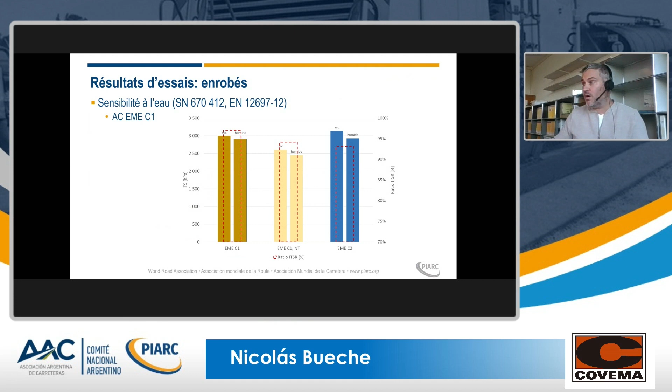And then finally, we did some stiffness and fatigue testing. We work with a trapezoidal test in our standard, for stiffness and fatigue. It's a good test, but quite complicated to do. What's interesting is, if we consider the stiffness value for C1, we have a target value of 11,000 megapascal at 15 degrees, 10 hertz, and for C2, 14,000 megapascal at 15 degrees, 10 hertz.

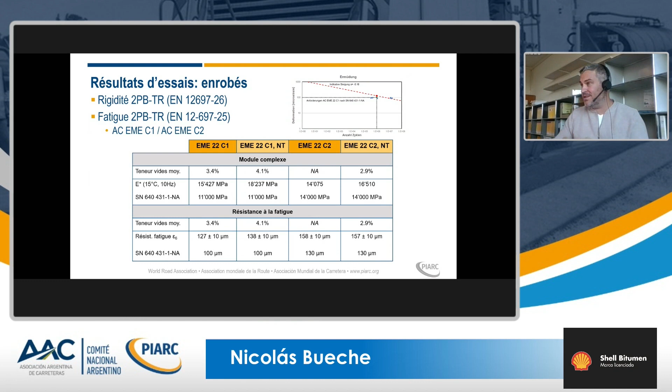We could see that for both asphalt mixtures, we could reach the target value related to stiffness, and the same for fatigue, above the limit value of 100 or 130 microdeformation. This means for high modulus asphalt, warm or hot, with a high dosage of reclaimed asphalt, we can meet the target value of stiffness and fatigue testing, which for us was quite interesting. It was a bit tricky, we had to do one trial for one of the mixtures. It didn't work directly, but then it was okay, and they managed to do it. All this material has been used for highway construction without any specific problem.

So just a short summary also from a more practical experience from the laying company. First, for the recipe, we needed 1 or 2 iterations just to make sure the tricky point, the fatigue and stiffness, meet both criteria at the same time. Then a very important control point is the humidity, the water content of your asphalt mixture. It's a very simple measurement, but we have to control the water content at the job site. If you have too much water, you will have problems. Here we got like 0.04%, it was okay, the forming process was okay.

The compaction was also interesting, and this has been measured by the construction company. For the compaction energy, the company needed one more compaction vehicle to make sure we get a sufficient density and the needed void content. For the compaction, in the case of warm mix, we need a bit more energy in situ to ensure we have the right compaction degree.